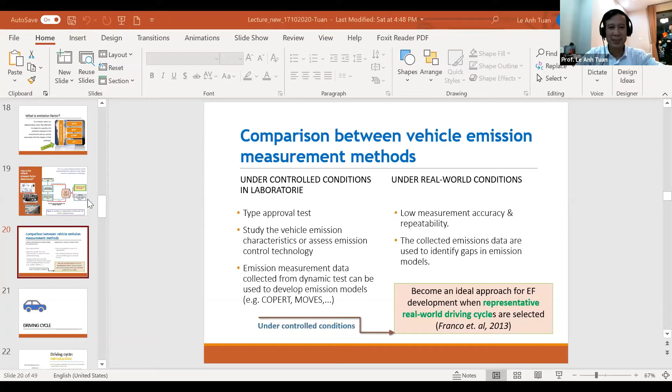Hello, everybody. Good morning in Mexican time and good evening in Vietnam time. It is very exciting for me as well, for the first time to deliver a presentation to Mexico, which is very far, 12 hours different from Vietnam. So, a little bit about the COVID-19 pandemic. The situation in Vietnam is much better now. And I hope that the situation in Mexico is also getting better and better. Can you hear me?

Okay. The topic of my presentation is driving cycle development and emission control for road vehicles, the case of Vietnam. The presentation is prepared by myself and also my PhD student, Dr. Nguyen Thi Yen Lien from the University of Transport and Communication.

The content of my talk consists of the following items: background of the emissions, overview of vehicle emissions, transport-related air pollution, transport-related emission control in Vietnam, and then we come to driving cycle development, how to quantify vehicle emissions and how to determine vehicle emission factors, and also some results from our study on driving cycle development. If you would like to interrupt me anywhere to ask any question, please do not hesitate to raise your hand.

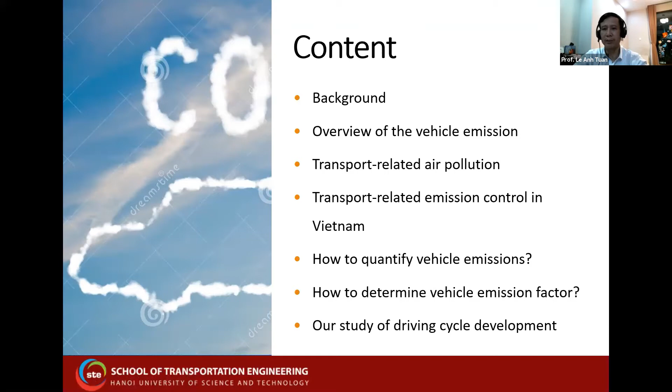First of all, let me introduce a little bit about my country, Vietnam. It is located in Southeast Asia, and the shape of my country is slender, stretching, in an S-shape more than 1,000 miles long. The capital is Hanoi, in the north of Vietnam, and the biggest city of Vietnam is Ho Chi Minh City in the southern part. The population of Vietnam is approaching 100 million people.

For the transport sector, Vietnam is known for lots of vehicles, because it is dominated by motorcycles. Motorcycles now share more than 90% of the total vehicle fleet in Vietnam, with a total of 40 million motorcycles, but the number of cars is only 3.5 million. Public transportation is still a very small percentage of the vehicle fleet, only 0.03% in Hanoi. And traffic jams are also one of the big issues recently in the biggest cities of Vietnam, including Hanoi, Ho Chi Minh City, Hai Phong, and some other big cities. So the transport sector is the main source of air pollution in Vietnam.

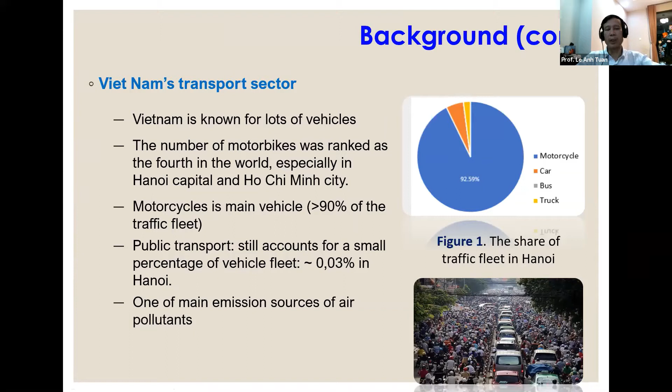And about the automotive industry or automotive market in Vietnam, let's say compared to other ASEAN countries, in ASEAN, Thailand would be the champion in the number of domestic car production and car sales, and the second would come to Indonesia, Malaysia, and Vietnam ranked the fourth, with about 400,000 car sales and approaching 200,000 cars domestically produced every year.

So I would say that the automotive industry in Vietnam is just initiating. So it has very high potential. That's why many car makers would like to allocate the factory in Vietnam.

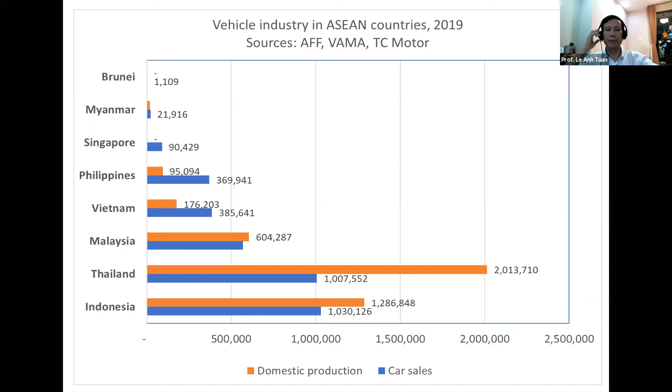And let me move to the overview of the vehicle emissions. In this figure, we can see that we must care about the exhaust emissions, including carbon monoxide, carbon dioxide, particulate matters, sulfur oxide, nitrogen oxides, and hydrocarbon. And of course, we also have to care about the evaporative emissions, including hydrocarbon and volatile organic compound.

Together with that, we also have to care about the refueling losses that also cause hydrocarbon and volatile organic compound, and the road suspension wear produces particulate matters, and the abrasion of tires, brakes and clutch also produce PM.

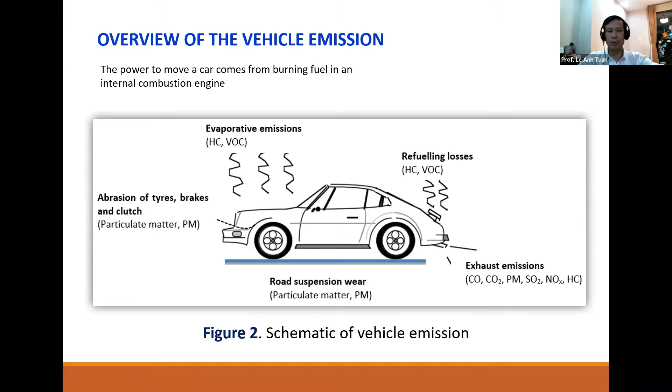And the significant emission from the exhaust, we can see that the emission sources are coming from industry, from traffic, from domestic heating, for example, and due to the transmission, it causes the air pollution and effects to the people and environment.

And finally, we have to care about the air quality. It is the concentration of the components in the air which finally sets after transmission when interacting in the specific place. So let's say that topography, meteorology, and physical chemical reactions also contribute to the formation of the air quality,

and let's say the air pollution, and it affects directly the people and plants and also the environment. And let's say overall it also causes climate change.

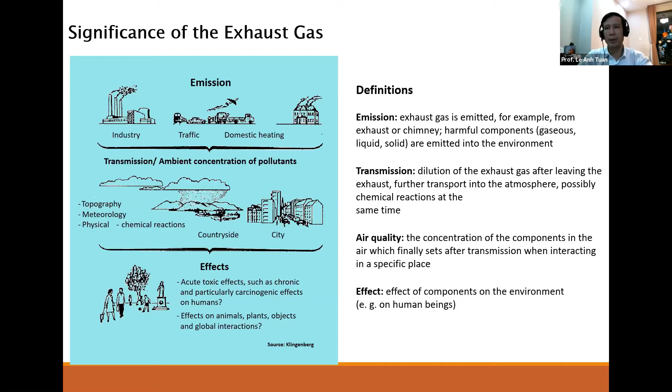And emission from vehicles, there are many types, and as I already mentioned in the previous slide, it includes the running exhaust, idle exhaust, starting exhaust, diurnals, resting loss, also running losses, tire wear and brake wear.

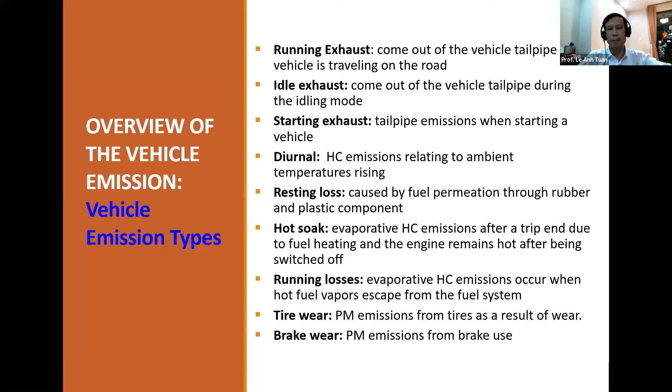And in more detail, maybe you already know that carbon monoxide is the result of incomplete fuel combustion. Carbon dioxide is the result of complete fuel combustion, and it is not a toxic emission, but it is a greenhouse gas and causes climate change. Sulfur dioxide,

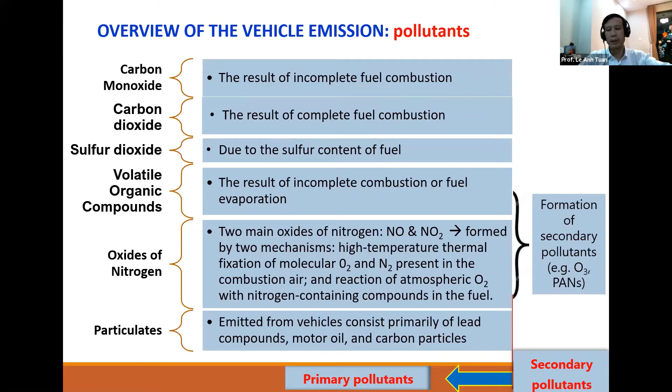the volatile organic compounds, the result of incomplete combustion and fuel evaporation. And nitrogen oxide and particulate matters. And when we talk about particulate matters, we have to care more about diesel vehicles than gasoline vehicles.

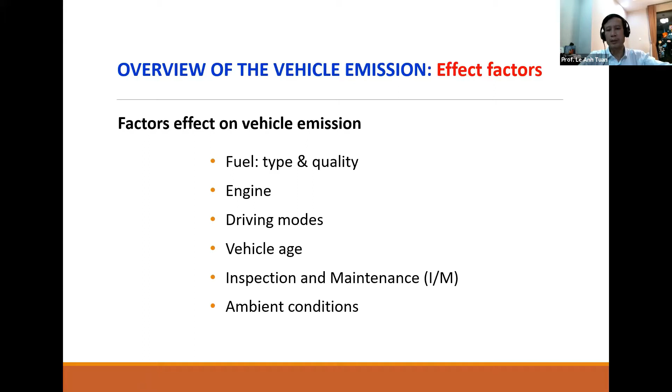So a lot of factors affect vehicle emissions, like fuels, for example, fuel type and quality of the fuels, the engine, engine technology, I would say, driving modes, vehicle age, inspection and maintenance also affect the level of emission factors, and of course the ambient condition as well.

So let me talk about the transport-related air pollution. The road transport is one of the main sources of air pollution. PM emission from diesel engines is one of the big concerns of our world now. So PM10, PM2.5, it is the main concern, and due to the particulate matters, many cities in the world and also some automakers already announced to ban diesel engines from 2025 and 2030.

Emissions of precursors that make up the ground ozone. It is a huge problem now and also in the future. So we have to care about the volatile organic compounds, NOx, and also we have to care about the hydrocarbon as well. So the disease burden caused by air pollution relating to transport is leading to future challenges to our world.

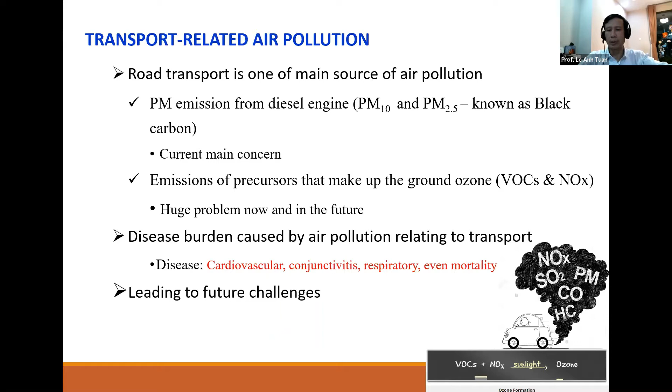And about the transport-related air pollution in Vietnam, the pressure on urban air quality is mainly due to transport activity. At this moment, transport consumes the third highest energy in Vietnam. It consumes about 22% of the total energy. This implies that transport can be one of the main sources causing air pollution.

The traffic, this data comes from our recent research, traffic contributes 46% of the PM0.1 mass. So PM0.1 is known as nanoparticles. And diesel buses and trucks are the main emission sources of PM.

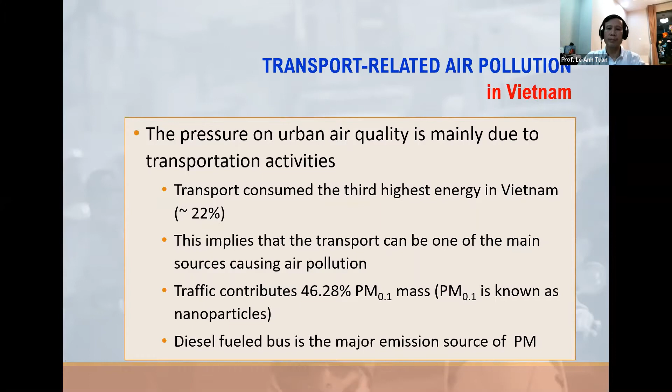And how about the emission control in Vietnam? We, let's say, implemented the Euro 2 emission standard for vehicles since 2007, but in reality it is about the 2010s, I would say. It is important that emission standard or emission control must go together with fuel standard.

And so here we also have the refinery stage for Euro 2 fuels, produced domestically as Euro 2 until 2018, and from 2019 the Euro 4 fuels are sold in the market, and Euro 5 is also selling in some petrol stations. And the emission standard is officially regulated as Euro 4 since 2017.

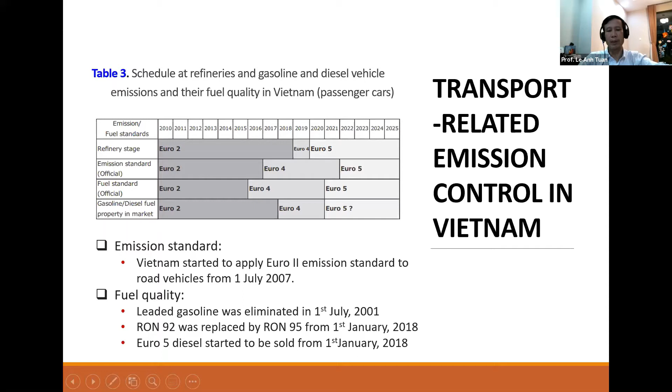And right now in the market, for gasoline, we have two types. The first one is RON 95, and the second one is RON 92. And this RON 92 is the E5 fuel, so it's not pure gasoline, but it is already blended with 5% ethanol.

And how to quantify the vehicle emissions? The total emission is equal to the emission factor multiplied by the vehicle activities. So the emission factor has a unit of gram emission per kilogram fuel, or gram per kilowatt hour of the engine, or gram per kilometer traveled, or gram per second.

So the emission factor plays a very important role, and the vehicle activity is the total consumed fuel, power demand, vehicle kilometers traveled, or idling duration. From the vehicle activities and the emission factor, we can calculate the total emissions for one fleet of vehicles, and we can sum it up with other fleets, and we have the total emissions from different vehicle types and categories.

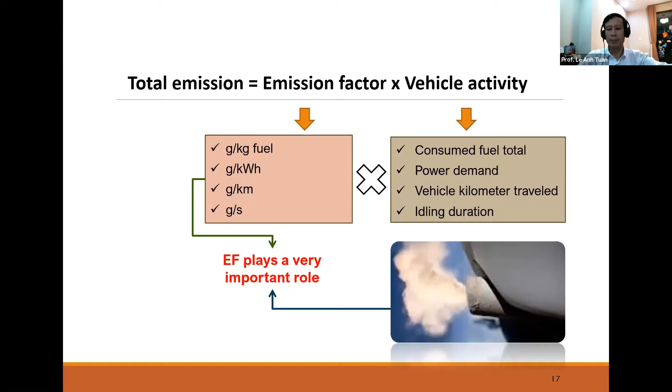So what is the emission factor? An emission factor is a representative value that attempts to relate the quantity of a pollutant released to the environment with an activity associated with the release of that pollutant. For vehicles, as I mentioned before, the emission factor has a unit of kilogram per kilogram or gram per kilogram, gram per kilometer traveled, gram per kilowatt hour, or gram per second.

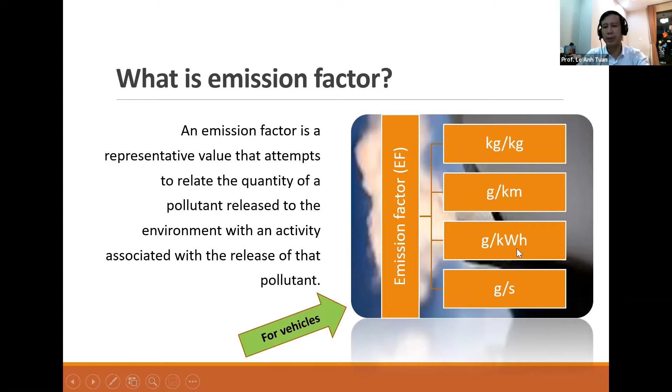And how is the vehicle emission factor determined? It is a very complicated process, and it costs a lot to determine the emission factor for vehicles, because there is not only one type of vehicle on the road, but many types with many ages and variations. So we have to categorize the vehicles, and from each category we have to take emission measurements, and decide what kind of driving cycle we should use for emission measurements.

So there are two ways to measure the emission factor. One way is to install the measuring systems on board and then go to real-world driving, but that costs a lot. So usually researchers will use a driving cycle. A typical driving cycle has to be developed based on real-world driving data, and then we can use that driving cycle to run the engine or to run the vehicles on the chassis dynamometer. From that we can obtain the emissions and of course the emission factor.

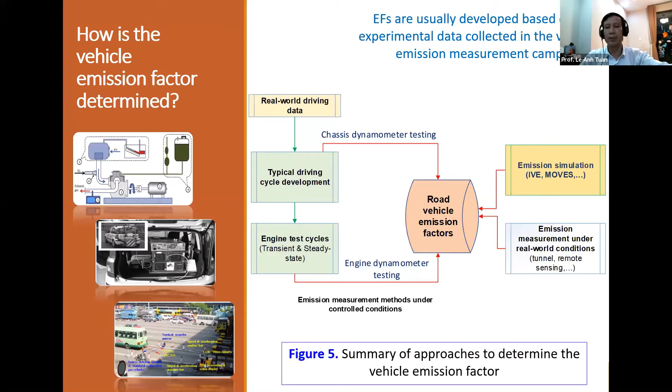So in this figure, we summarize the approaches to determine the vehicle emission factor, and a comparison between vehicle emission measurement methods. There are two ways to measure emissions: under controlled conditions in the laboratory or under real-world conditions. As I mentioned before, under real-world conditions there is low measurement accuracy and repeatability, because it changes a lot due to traffic conditions, ambient conditions, and driver behaviors. The collected emission data are used to identify gaps in emission models.

And in laboratories, it is sometimes like a type approval test, to study the vehicle emission characteristics or assess emission control technologies. Emission measurement data collected from dynamometer tests can be used to develop emission models, so we can use software like COPERT or MOVES. Under controlled conditions, it becomes an ideal approach for emission factor development when representative real-world driving cycles are selected. It is also mentioned in Franco 2013.

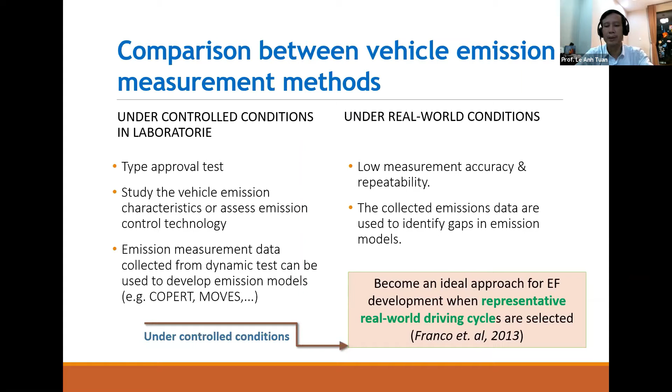So, does anyone have a question? I think we will wait until you finish, but go ahead.

You can continue and we'll ask you the questions at the end.

Okay. Thank you. So in order to conduct the emission measurements in the laboratory, we need the driving cycle. And here we can say that it is a transient driving cycle. It is vehicle speed over time, so we can see that the speed fluctuates a lot. And this one is obtained from the real-world driving conditions.

And there are also polygonal driving cycles, like NEDC, the New European Driving Cycle for passenger cars and light duty vehicles. So a driving cycle commonly represents a set of vehicle speed points versus time, used to assess fuel consumption and pollution emissions of a vehicle in a normalized way so that different vehicles can be compared.

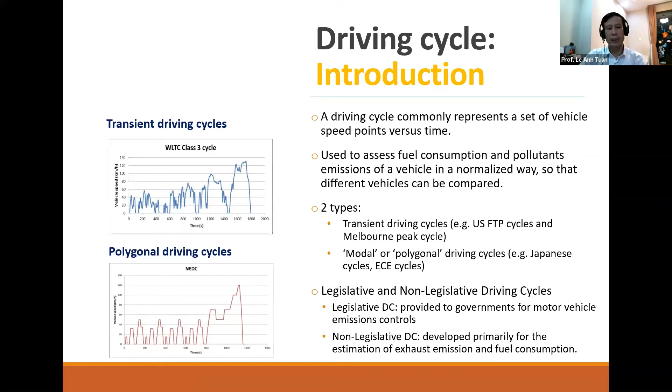The construction methods for driving cycles: there are three main steps in driving cycle development. The first one would be route selection. So we have to select the route for implementing the chasing method on the real-world driving behaviors. Then the real-world driving data collection. And then from the data collected, we can analyze and develop the driving cycle. The studies are often different in the data collection and cycle construction methods.

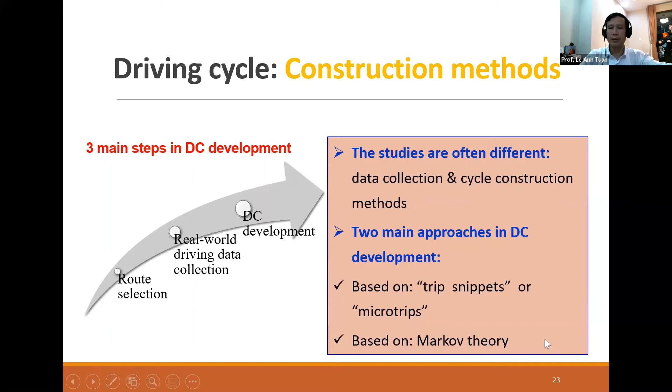There are two main approaches in driving cycle development: based on trip snippets or microtrips, or based on Markov theory. And Markov theory is quite a popular method to develop the driving cycle.

And the final part is our study of driving cycle development. A little bit earlier, in 2008, I myself developed a driving cycle for motorcycles. And then in 2011, I supported another team in Hanoi to develop the driving cycle for motorcycles and light duty vehicles in Vietnam. And in 2013, I published a paper on the development of a driving cycle for motorcycles in Hanoi.

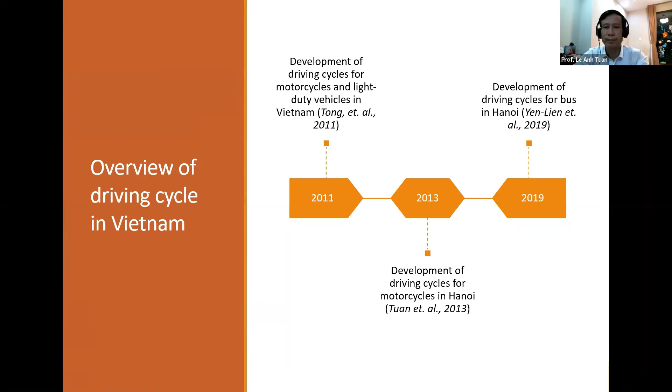And then last year, I and my PhD student, she already got her PhD, developed a driving cycle for buses in Hanoi. And these are the routes that we selected for our data collection. 15 routes were selected, including 3 route types: circular, radial, and straight. And it is the area of the whole Hanoi. We go through downtown and also to the suburbs of Hanoi.

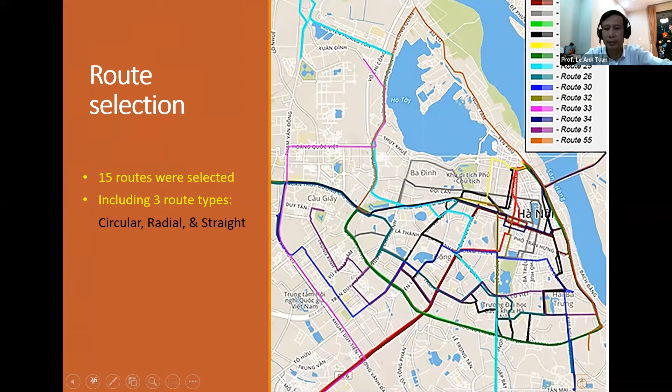And to collect the real-world driving data, we need the GPS device, and the real-world driving is recorded continuously from the starting point at 6 a.m. to the finish point at 8 p.m., on weekdays and at weekends as well. And we have to divide the times into the peak hour in the morning, in the afternoon, and the office hours, to categorize the traffic condition. The data were collected every second to avoid losing information and to make sure that the real-world driving data has the Markov property.

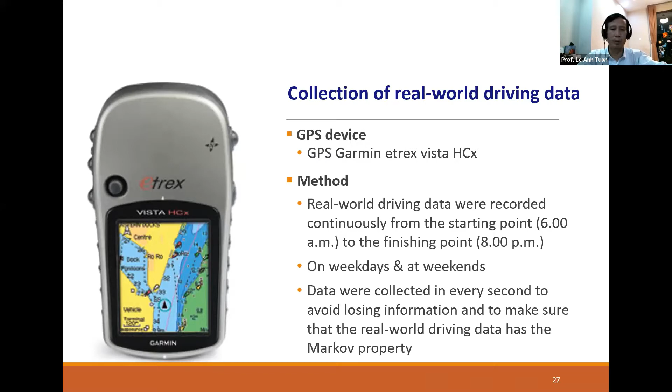So with the data collected from the real world, we have to process the GPS data. The purpose of this process is to standardize data in steps 1, 2, and 3, remove the random errors related to loss of signal data, spikes in the signal, and zero speed drift in steps 4 to 8, and denoise the final signal using a Kalman filter in step 9.

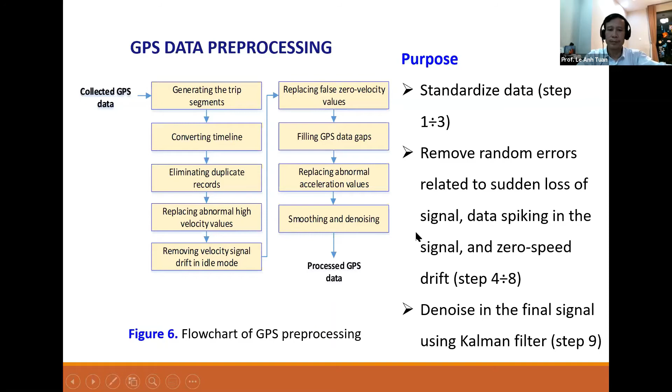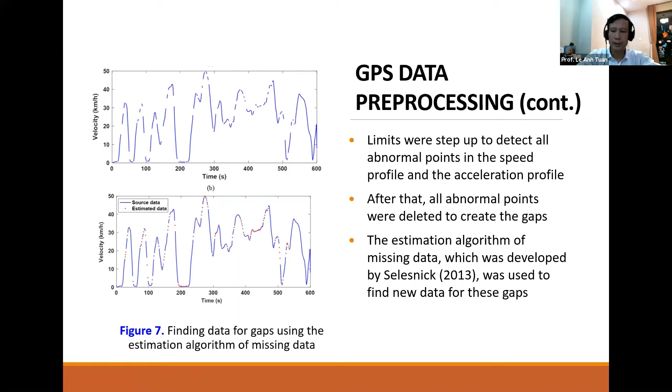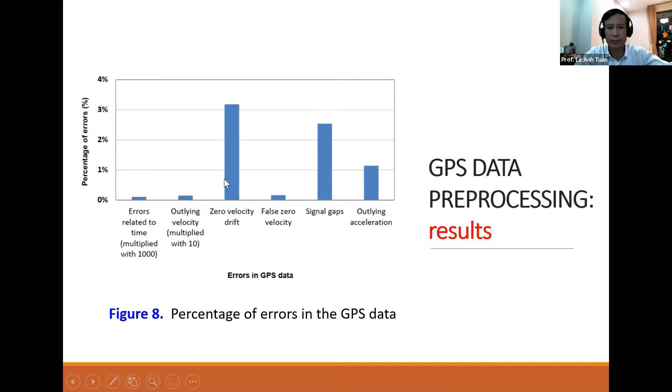And the result here is the percentage of error in the GPS data, summarized in this chart. We can see that after the correction, the percentage of error is less than 4%. And you can take a closer look at this process in the paper on GPS data processing for driving cycle development in Hanoi.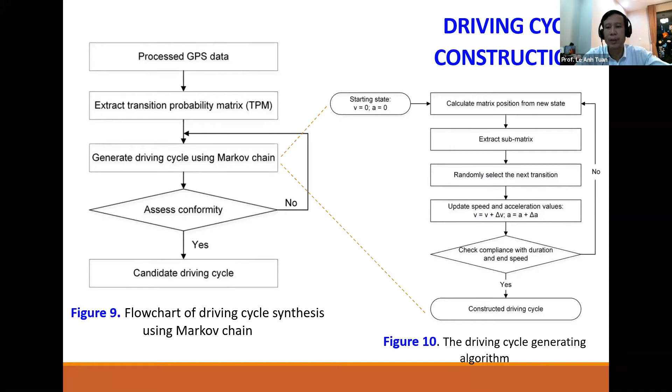Driving cycle construction is the next step. Here showing the flowchart of driving cycle synthesis using Markov chain in figure 9, and the driving cycle generating algorithm in figure 10. I will not go into detail, but anyone who would like to take a closer look can contact me or my PhD student, Dr. Lien, for any questions.

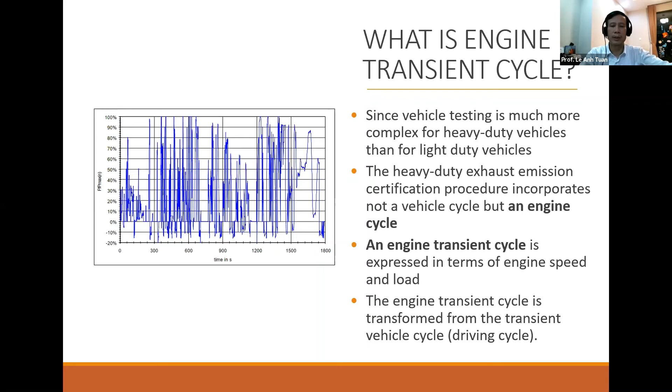So what is the engine transient cycle? It is power or load together with time, versus time. An engine transient cycle is expressed in terms of engine speed and load. The engine transient cycle is transformed from the transient vehicle cycle. That means we still have to collect the real world data of heavy-duty vehicles or buses, and from that data - vehicle speed versus time - we convert it to power, load, and engine revolution, engine RPM.

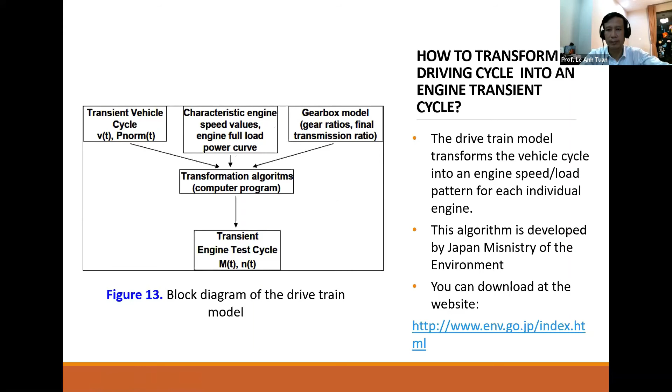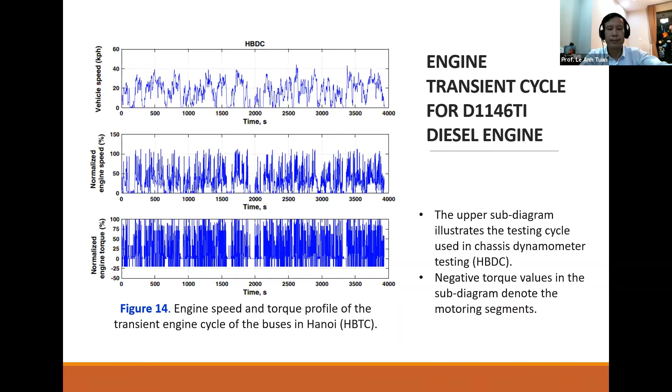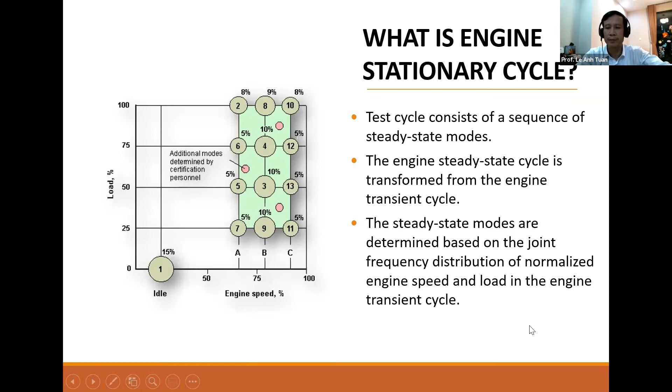The test cycle consists of a sequence of steady state modes. The engine steady state cycle is transformed from the engine's transient cycle. The steady state modes are determined based on the joint frequency distribution of normalized engine speed and load in the engine transient cycle.

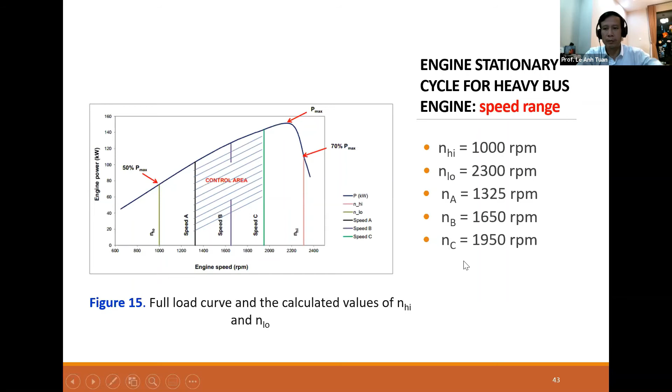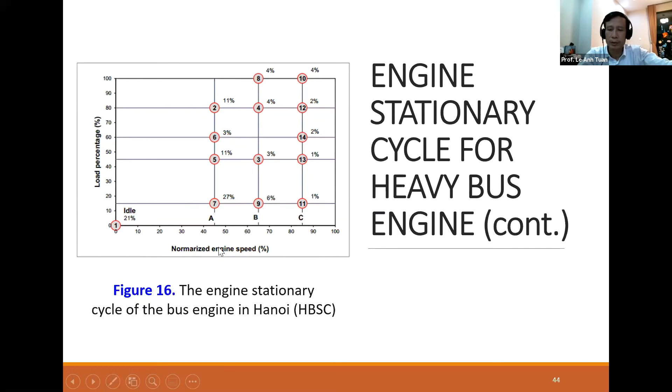Country-specific emissions factor for buses in Hanoi. So we have already developed the driving cycle, and now we calculate and run experiments to derive the emission factor creation for buses in Hanoi.

In our study, the carbon monoxide emission factor is 1.8 grams per kilowatt hour, while when we run the engine with the R49 European driving cycle, the CO is only 0.39. Hydrocarbon is quite similar, NOx is quite similar, but CO2 is very much different.

And for PM it is quite similar. So let's say that the real world driving cycle is already implied in the emission factor given in our study. This shows the transient effect of the driving cycles.

That causes very high carbon monoxide with a lot of acceleration and deceleration in real conditions and real world driving patterns. That process also produces a lot of CO2 as well, compared to the standard driving cycles.

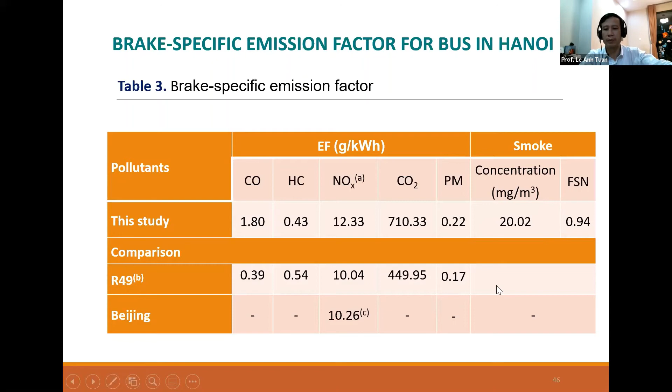You can take a look in detail in one of our papers written in the Environmental Science and Pollution Research journal, development of the specific emission factor for buses in Vietnam.

Let me conclude my presentation. Based on the real-world driving cycle data, we developed a typical test cycle for buses in Hanoi in order to be ready for developing the country specific emission factors. Determining the country specific emission factor is a very good basis for improving the quality of emission inventory, as well as integrated air quality management in Vietnam.

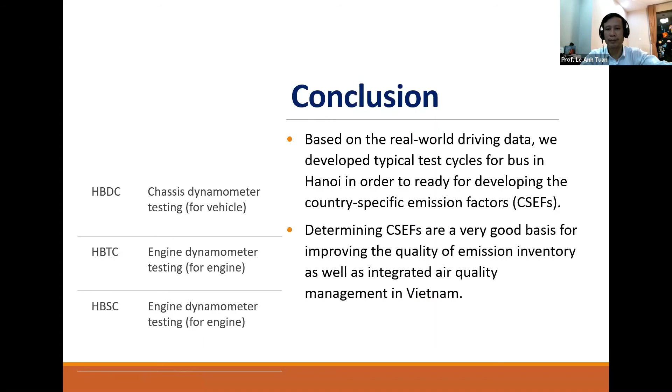So we managed to develop the chassis dynamometer testing for vehicles: the Hanoi buses driving cycles, Hanoi buses transient cycles for engine dynamometer testing, and Hanoi buses stationary cycles for engine dynamometer testing. Okay, thank you for your attention.

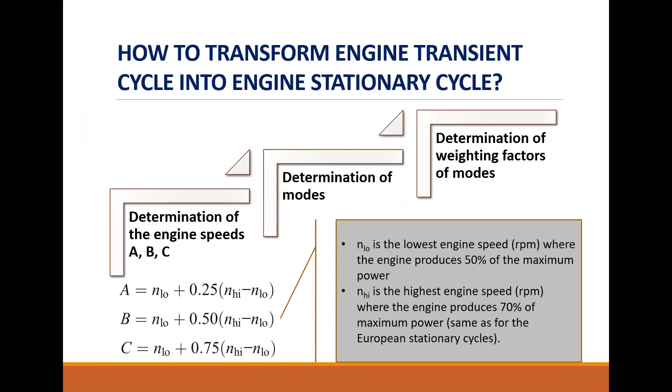Okay, I have a very simple question about how you calculate the difference in SAFD, the speed acceleration frequency distribution. But since we're short of time, I also would like to know why people continue using motorcycles that use fuel instead of electric motorcycles, especially in regions with a huge amount of motorcycles. What is the difficulty there?

Can you repeat your question? The second one, the second one. Yes, I'm wondering why countries or regions that have a huge amount of motorcycles continue using motorcycles fueled with gasoline or hydrocarbons instead of electric motorcycles. The contribution to reducing emissions would be so important. So why don't people change to electric motorcycles?

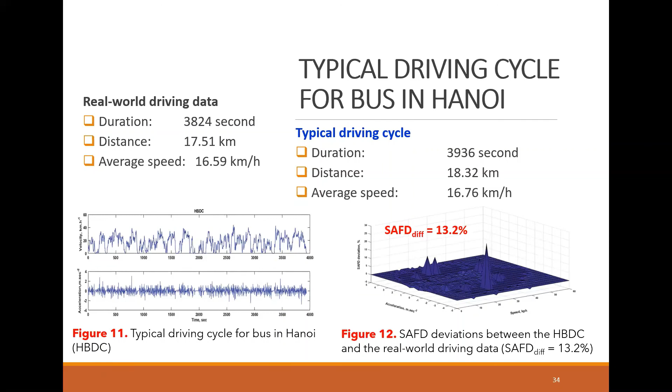For the second question, could you please change to the slide with the formula while you answer? Yes, thank you. Please continue. For the second question: why don't we change from conventional motorcycles to electric ones? Is that right? That's correct, that's my question. Yeah, electrification is a trend now for our goal, and Vietnam is also joining that.

Right now we have a total number of two-wheeler vehicles in Vietnam of about 40 million, including 2 million electric bikes and electric motorbikes already. So we aim to change from internal combustion engine motorcycles to electric ones.

And Hanoi already announced that by the year 2030, all motorcycles have to change to electric. That's why right now some automakers and motorcycle makers are producing, releasing, and introducing several e-bikes and e-motorbikes to the Vietnam market. I believe the number of e-bikes and e-motorbikes will increase very soon, and the process of changing from conventional motorcycles to electric ones is improving. I believe the share of electric motorcycles will be like a revolution in Vietnam in the coming years.

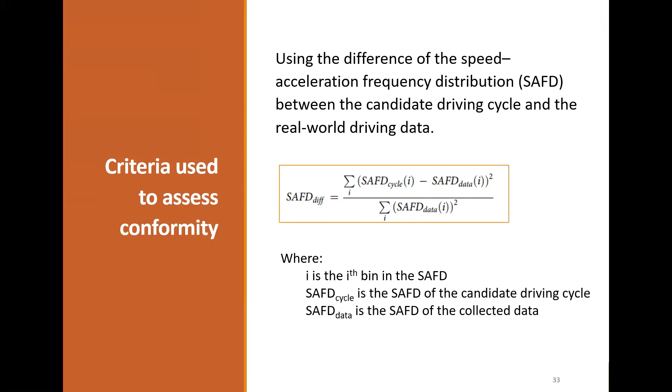Okay, thank you very much. Thank you. Okay, thank you very much. Is there anyone else who has a question?